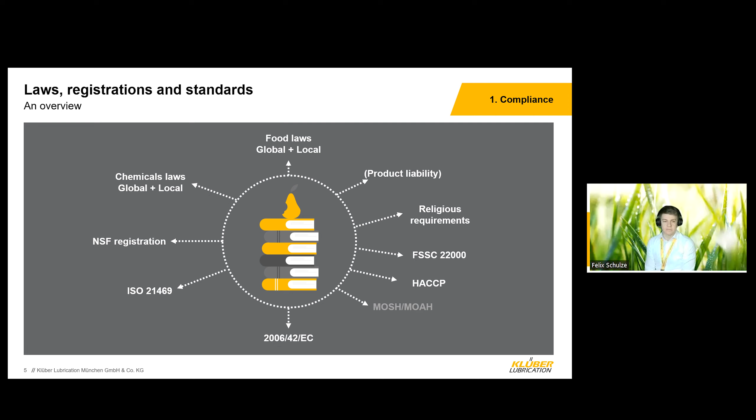At Klüber, we are only working with NSF, but remember there could be others which can register food-grade lubricants. We also implemented the links which you can see on the slides. When you click there, you will get an overview of all food-grade lubricants which are available on the market. It's open for everybody, everybody can see it, and it could be of interest to you.

Yeah, but what actually is a food-grade lubricant? I think you might have heard about it, and I will explain the differentiation between all the registrations and what is behind them. The most common one is the H1 lubricant. It's the lubricant which is used with technically unavoidable food contact. What does it mean? I will explain in a minute. We have H2 as well, for lubricants without food contact. We have 3H, which are the release agents with direct food contact.

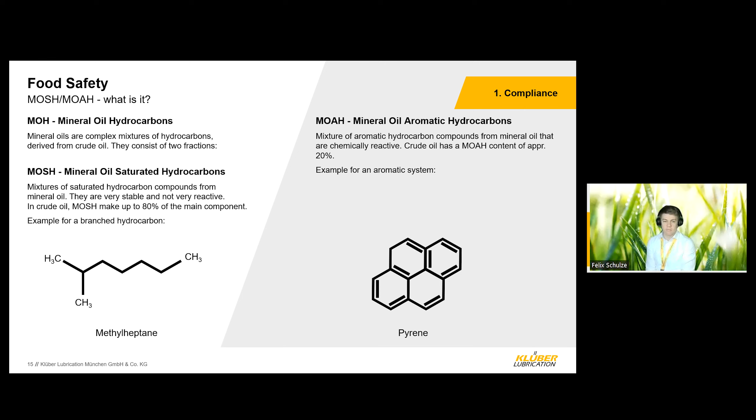So what I wanted to say with that, it's not only the lubricant that might be a risk, but other reasons. And in my opinion, we as a lubricant supplier are not the problem, but we can support you strongly in your MOSH and MOAH management by supplying a tailor-made solution to avoid the risk of contamination, at least by the lubricant. We as Klüber have the same problem. We also get some raw materials and produce our final products. And as we have the same problems, we also can find some MOSH and MOAH in our products. But nevertheless, we would like to deliver this tailor-made solution for your application to protect you from the risk of contamination. On the next slide, you can see examples where MOSH and MOAH can come from. You can read it afterwards when you receive the presentation. Yes.

Okay, so this was the compliance topic behind it, but how does it look in practice? Estelle will tell you in a minute about world-class lubrication, because we showed you how we as a lubricant supplier can support you in all the compliance work, but we also can deliver some trainings and other activities. And Estelle, now it's your turn again.

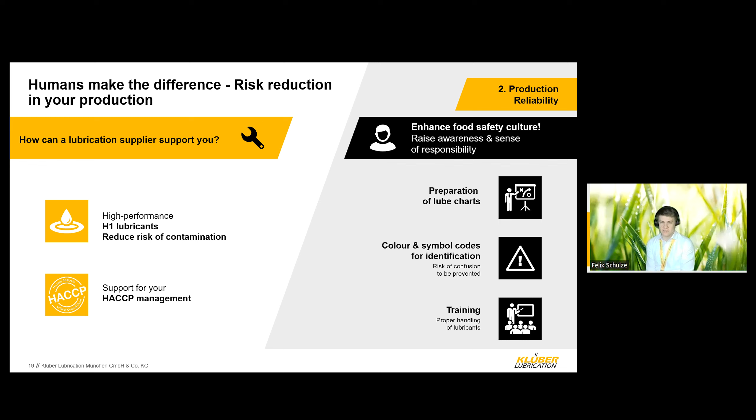Thank you, Felix. Okay, so Felix has given an overview of the compliance requirements, where the various registrations come from, etc. But on a practical level, what can you do as an organisation to ensure that you are operating compliantly, operating efficiently, and supporting and embracing that food safety culture? So when it comes to talking to your lubricant supplier, you start with a structural assessment. This could be like a snapshot of where your organisation is. You can look at all sorts, not just lubrication, but handling, storage, what training you have in place, where your personnel are, etc. It's quite a wide-reaching overview of where you are.

The next part is mapping and scheduling. So this is where you carry out a lubrication survey. You will have mapped all your assets and every single lubrication point on site. From there, you can start to look at standardization and rationalization. So often we'll go into a site and go, we've got 10 greases that will do the job of one grease. Nobody wants to have loads of products on site. It increases the possibility of contamination, cross-contamination, and confusion. So you want to have the lubricants on site that you're going to use and that are appropriate for the jobs that you have.

A really important part is training and development. It's important that your staff know what they're doing and understand why they're doing it around lubrication. So many people see it as a bit of old oil or grease. Well, actually, there's a lot of chemistry, a lot of research and product development within this area. So it's important that they understand what they're doing. And also, in the last couple of years certainly, we've had an increased request for training because it's been pulled up in an audit. Lubrication knowledge on site now seems to be something that auditors are looking for.

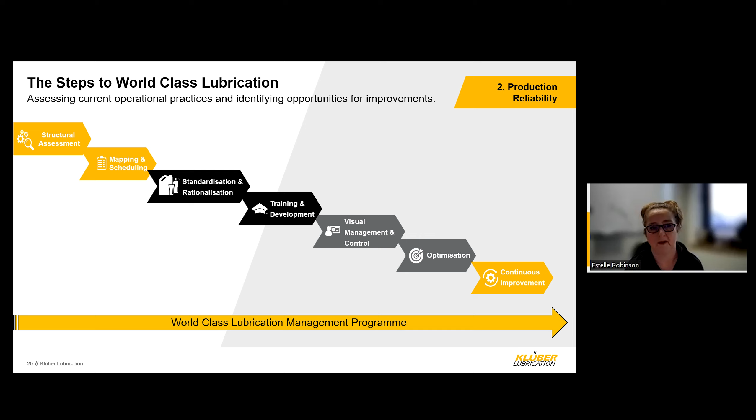So structural surveys, kind of step one, might not be something you want to do, but it's quite useful as it gives you a snapshot of where you are. It could look at all different aspects. It could be visual management, it could be what procedures and guidelines you have in place. How are you handling and managing those lubricants? It might be that the assessment at the end of that shows that actually 80% and above, you're already operating best practice, you're doing really well. You've got a great lubrication management program in place.

It could be that it's looking a bit chaotic, less than 20%, not necessarily the end of the world, because there are some really easy quick fixes you can put in place that will improve that really quickly. But most sites are generally somewhere in the middle. So there's improvements that can be made for sure. Some of these improvements are really quick, some could be a long-term project. But that's quite a useful overview, just to give you an idea of where you are.

Next slide, please, Felix.

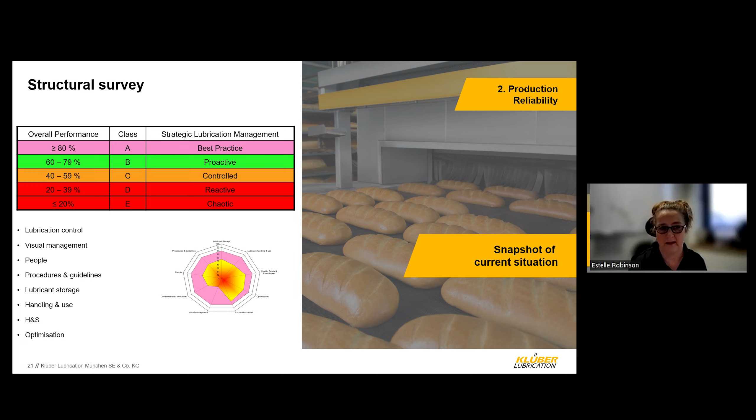Now, this mapping and scheduling, this is the absolute bedrock. To me personally, I think this is the most important aspect of any lubrication management program. This is where you have a lubrication survey carried out by your lubrication supplier. They will go through your site from, go back a slide, please, Felix. I'm sorry. There we go.

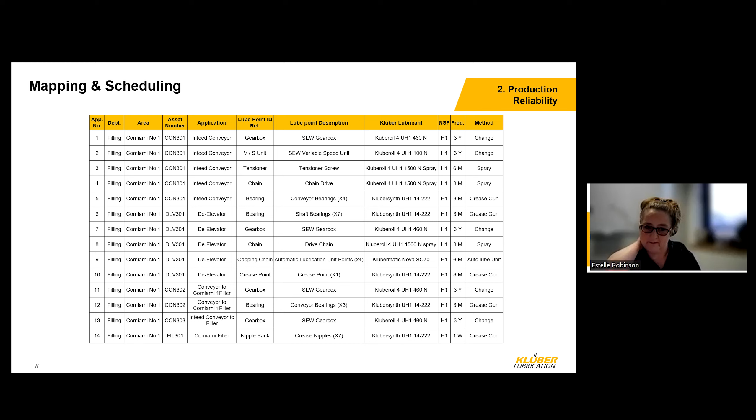So we'll survey the site from beginning to end following the direction of production. Every asset on site will be logged: the lubrication reference, where it is, lubrication point description, the recommended product, confirms that it's NSF-H1, how often you need to lubricate that particular piece of equipment, and by what method. This is your absolute foundation. It's a really important stage that needs to be carried out. Okay, Felix, we can go on to the next slide.

At the end of that, you will have a list of recommended products. It's a summary of what you have on site. We will also have gone through a standardization process. So as I referred to earlier, you might have 7, 8 greases as your site grease, but actually you just need one. It's not unusual for us to be given a list of lubricants by a current supplier and go, right, can you match those? That's all well and good, but you're not necessarily using the correct lubricant for that particular application. That's an important process to go through, and that's what your survey does.

And at the end of it, then you know that those are the products that you need on site, those are the products that you need to store, look after, apply a colour coding system to if you want to, but it keeps everything neat and tidy.

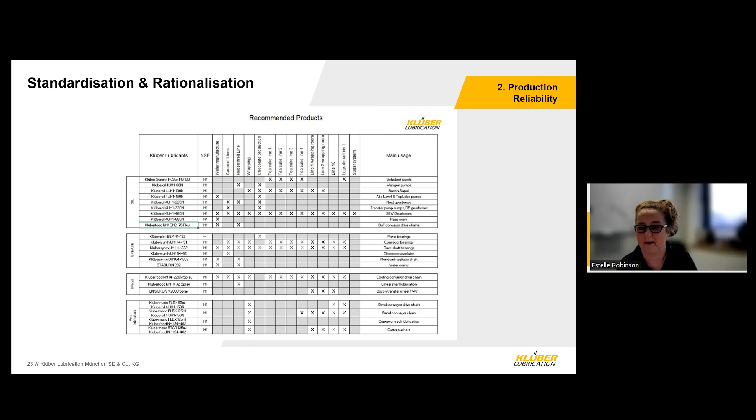Okay, Felix, next slide. When it comes to making recommendations on that survey, the recommendations are done primarily by OEM recommendation. So you know that if you've got warranties in place, you're not going to invalidate those warranties, that we've worked with the OEMs, these are the best products and the ones that are recommended for that particular application. And next slide, please.

So as I referred to earlier, it's all well and good buying your H1 lubricants and putting your lubrication management in place, but your staff need to know what they're using, why they're using it, how they're using it, and it's at all levels. So operators, engineers. More recently, it's a common practice now for the everyday tasks, the easier tasks, to actually be done by the operators.

They just want their machine up and running, they just want to come in, get on with it and know it's not going to break down. So if they're doing those everyday tasks, those tasks are really important. They need to understand why they're doing it, need to understand how to handle those products. Just because they're H1 doesn't mean you can eat or drink them. Always bear in mind the maximum permissible contamination limit you have is 10 parts per million. That's tiny. It's incidental contact. So they need to understand health and safety and why we use different lubricants for different tasks.

Engineers do some of the more complex tasks, and they can be trained to understand a bit more of the chemistry that goes into the formulation of lubricants. Again, the types of different lubricants, whether they're synthetics, why we use greases over oils, etc., and the additives that go into the lubricants and why they're there.

And something that I promote with all my customers is train the trainer. So this is more in-depth training. When you take ownership of your lubrication management, you might nominate a couple of lubrication champions who have a specific responsibility to look after the lubrication on the plant. You could put those through some more in-depth training.

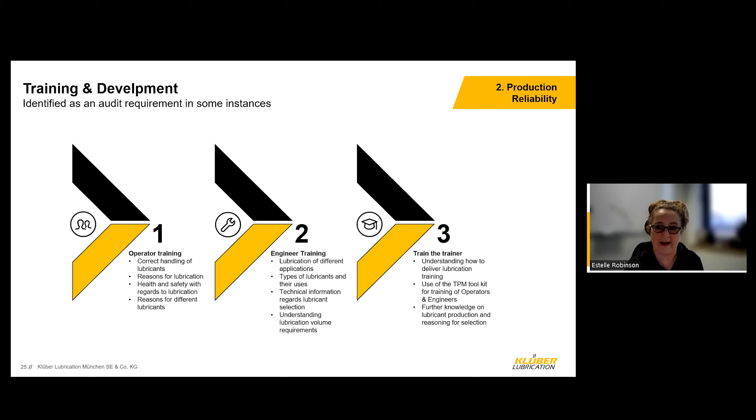And the beauty of that is that when they have that training, they are then equipped with the knowledge to pass that training in-house. So they can train your engineers, they can train your operators. So you don't have to keep pulling your lubrication supplier back out at additional cost to carry out this training. You can do it in-house. It's all about taking ownership. Okay, next slide, please, Felix.

So you've trained your staff, you've had your lubrication survey carried out, you've done your structural survey, you know where you are. So this is where you apply a colour scheme. Now, a colour scheme is all about making lubrication as foolproof as possible. The only limitation with the colour scheme is it tends to be limited by the colours available with your lubrication handling equipment, so your grease guns, your jugs, etc. And it tends to be a limit of 10 colours. Okay, but that still gives you 20 products, because you can have one colour for two.

So if we look at blue, for example, you've got an oil product assigned to it on the left, you've got a grease product assigned to it on the right. It's very difficult to put oil into a grease nipple or to fill an oil jug with grease. So with the difference in nature of the two products, it then gives you 20 products on that colour scheme that you can use. And we do have sites, some of the larger sites, that do use it all.

You might then want to roll your colour scheme across the plant. So you can have it in your lubrication storage areas, but you can label around the site, you can label all the lubrication points. Now think about what you want on that label. You can have your own company logo, you've got your product name there, but also you could state that it's NSF H1. And you can look at that label there and it's clearly a grease. Now auditors like to see this, it tells them straight away what's being used, where it's being used and how it relates to your colour scheme.

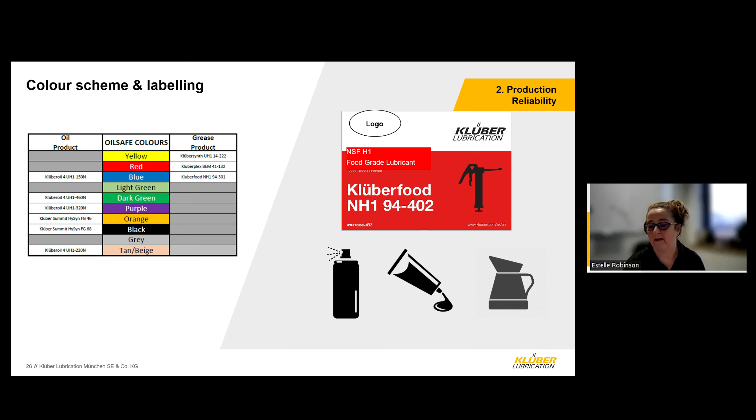Storage and handling. As you can see there, the colour scheme applies again. So if they know that they've got a red label by a grease point, it's going to be that specific grease gun. You can have the grease gun in red, you can have where it sits coloured appropriately as well, and then it relates to the label by the grease point.

You can have line side cabinets, so all the greases and oils needed for that particular line you can have in a cupboard on the shop floor next to the line, so everything is nice and easy to use. We find that people get lazy if they've got to trip trap back to the stores every time they need to get another grease cartridge or another spray. So think about what you want in your line side cabinet and make things nice and easy and convenient.

Outdoor stores as well, bunded, colour coded, everything you need in there. It just makes life nice and simple. So why do we even look at storage and handling? Well, it's about minimising risk, reducing cross contamination. You want to support those reliability improvements that you've put in place. You don't want lubrication related failures. You want to make it as easy as possible for people to lubricate those machines.

Maintain compliance. This is something auditors always want to see. Think about in your outdoor store, your storage area, keep your compliance folder there. So you have all your certificates in there, all your quality certificates, as well as your product information, technical information, safety information for all those products. And think about having a digital copy as well. You can speak to your lubrication supplier about that because you want it all easy to hand. So when your auditors come along, you're not panicking looking for stuff. It's all there, good to go. And really important is just to reduce cross contamination.

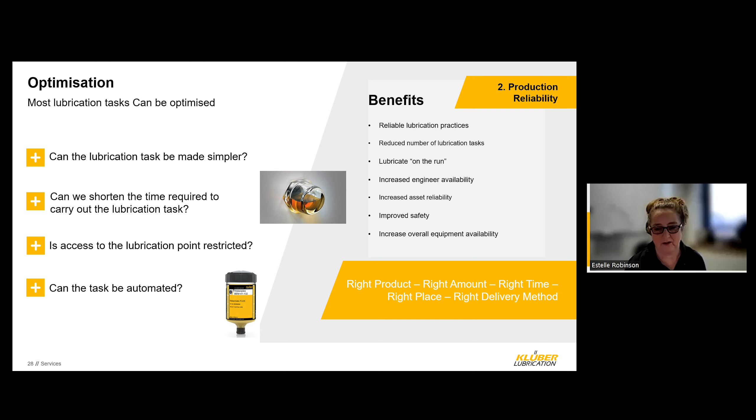So something you might want to consider for your larger assets on site is routine condition monitoring. Many times the large gearboxes could be on a planned maintenance, and you'll change the oil automatically after maybe 2 years, 3 years. The modern synthetics now can go significantly longer. So if you carry out regular analysis, it might be that you can get another 12 months, 2 years out of that lubricant, saving you money, reducing your waste.

But like with everything else, you want to make it as easy as possible. Sight glass is easy, but you can get sight glasses that act as sampling points as well. Sampling methods, how a product is sampled, is really important. So when we talked about training earlier, think about this as well: how to take a sample, how to make sure it's a representative sample. And also when the report comes through, your staff need to be able to understand the results and what the analysis is telling them.

It's usually pretty clear. They'll usually use a colour-coded system. It's all green, it's fine and dandy. But it's important to understand why it's done. And it's not just oils, you can do it with greases as well, but why it's done, and that it's done regularly. So you can create historical data. Then you can start to predict, you get trends. You can also start to predict when you're going to need to change that oil or grease.

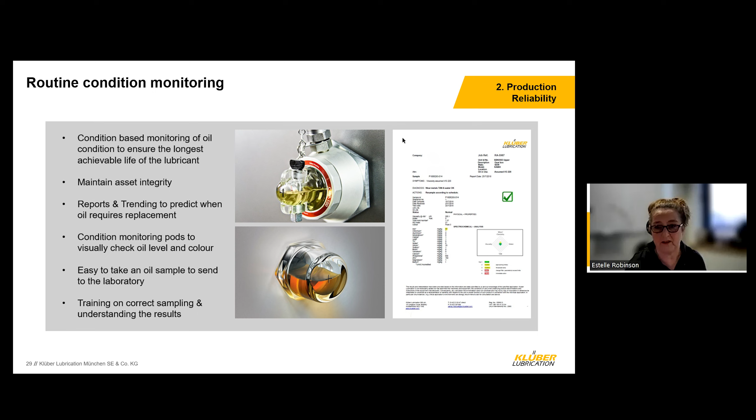Next slide, please, Felix.

So continuous improvement, as I said, those that take ownership work the best when it comes to a robust lubrication management program. It's painful for us to see that they'll get us in and we'll put it all in place, and then nothing happens and lubrication slides by the wayside. So it's important to think about continuous improvement. Employ those optimization recommendations. Ensure your survey is up to date. It's really important. If you have new assets coming in or you make changes to existing assets, you need to inform your lubrication supplier so the survey can be amended as appropriate.

Use the condition monitoring analysis. Then you can extend your drain intervals and get the most out of your lubricant. And work with your lubricant supplier to illustrate efficiency and savings over time. Sometimes it can be difficult to see, difficult to monetize what it is you're saving, where you're making your efficiencies. If you talk to your lubricant supplier, give them some estimated figures of what that failure downtime has cost you, and we will happily put things into a report and monetize it for you.

When it comes to bringing new assets on site, talk to the OEM. Are they happy? You pay a fortune for assets. You can say to your OEM that actually this is, for example, a Klüber site. We want that asset to come to site with Klüber lubricants in it. It's TPM ready. It's good to go. These are things that can be done.

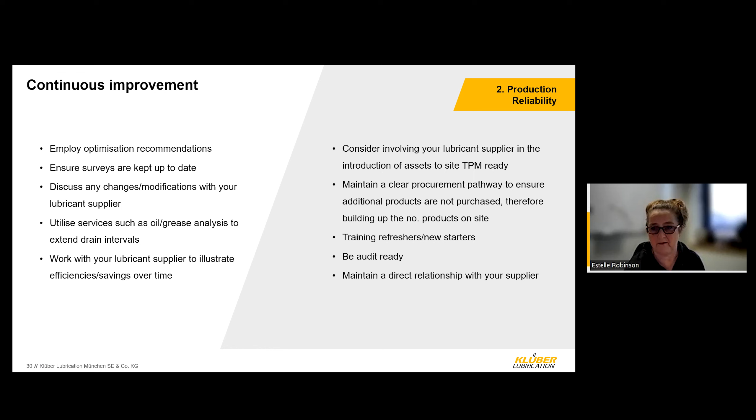Keep on top of your training refreshers, new starters, and operators. Once you have your lubrication management program in place, it's audit ready. So continue that, remain audit ready. So you're not in a panic every time you've got an audit coming in or auditors that are due on site. To operate in this way should be absolutely everyday practice and the norm. Okay, so there's some ideas of a few things you could do practically that ensure you're operating in a compliant way, a safe way, an efficient way, and it will help to maintain that food safety culture. So I'll hand you back over to Felix for the last couple of slides.

Thank you, Estelle, for these very practical insights in a production plant. Because of the time, I will now show you a short overview with figures of what Estelle just described. By using a high-performance synthetic oil, next to the food safety, you also have some savings. We can see here a slide with the energy consumption of some machines.

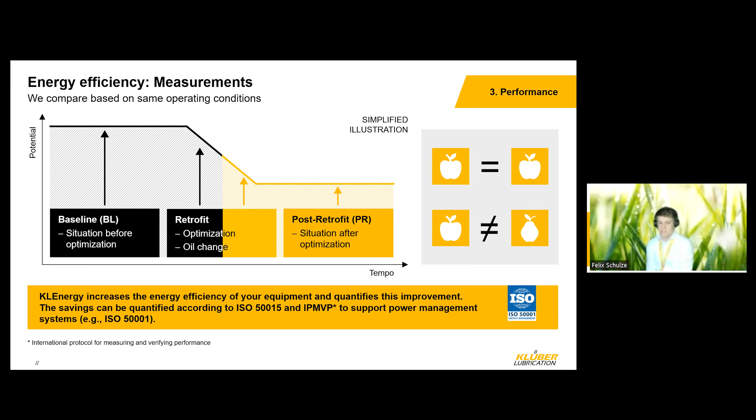Before using the high performance lubricant, you have a very high energy consumption. And then after changing to a high performance lubricant, you see your energy consumption is decreasing dramatically. And we can show it with an example.

You have a refrigeration compressor. I'm sure a lot of guys watching us today also have refrigeration compressors in their facility. It's one of the most important machines. It's running 24/7. And you can see here, they had to change the oil every 8,000 hours. They had a high working temperature and a high energy consumption.

And when implementing a right lubrication management system, you can see different advantages next to the food safety. You increase your oil change interval to 40,000 hours, which is more than 5 times longer. You reduce your energy consumption by 7%, and this is equivalent to a payback time within 3 months.